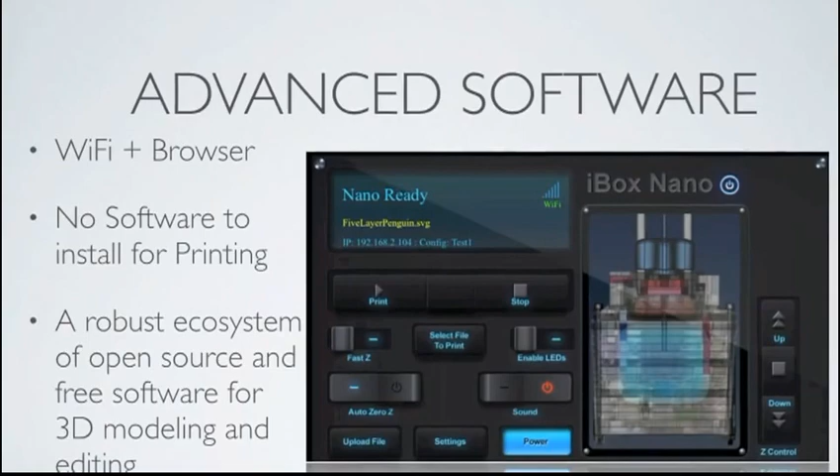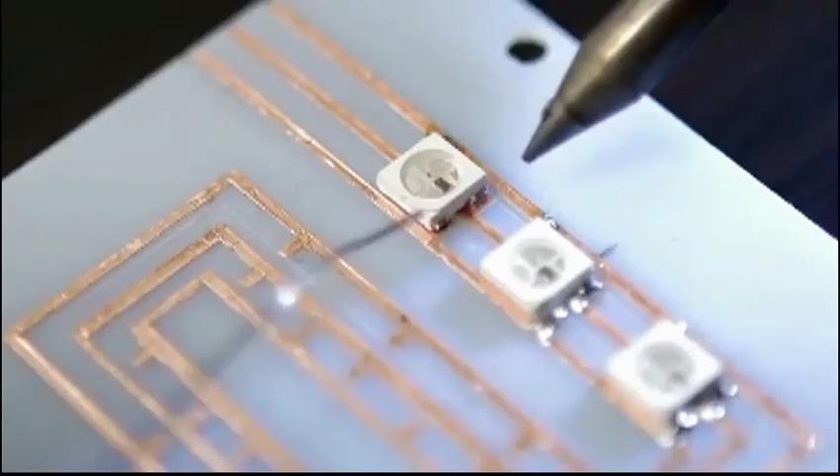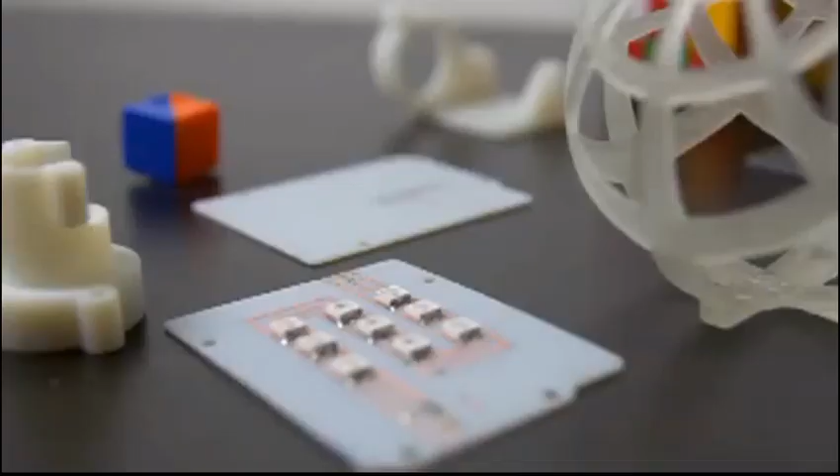Printers for the past 6 years, and these are really amazing tools for creating 3D objects right on your desk. But as an engineer, I really wanted to have those capabilities for electronics as well. We wanted to optimize rapid prototyping in a big way by making a stable and reliable machine that is future-proof.

The next one will change the landscape of 3D printing because it's the first electronics and multi-materials 3D printer that's affordable and fits on every desktop.

The next one is the first of its kind, being able to print integrated circuitry, multi-material and multicolor, all in one beautiful and simple design.

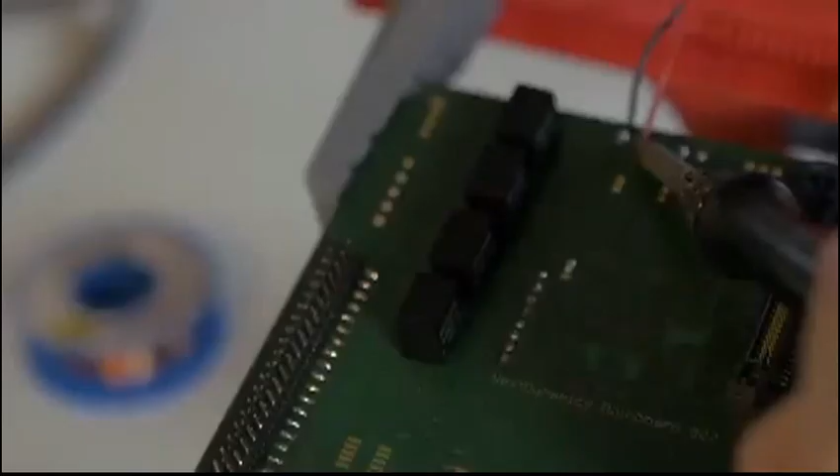We have designed the next one from the ground up and created a totally new type of printhead that can be precisely calibrated to print materials of many different characteristics.

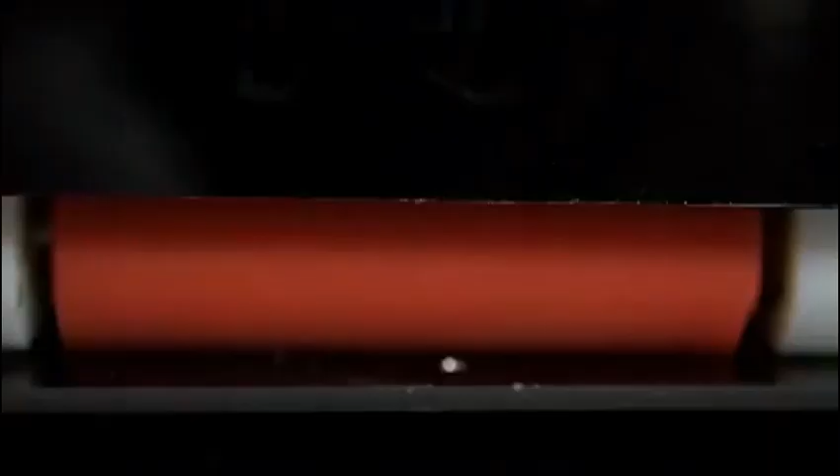We can already print conductive materials with super low resistance and combine them with many different ones that can be flexible, rigid, transparent and much more.

We also allow for the use of support material that can be rinsed off easily with regular water, which will make printing much more economical.

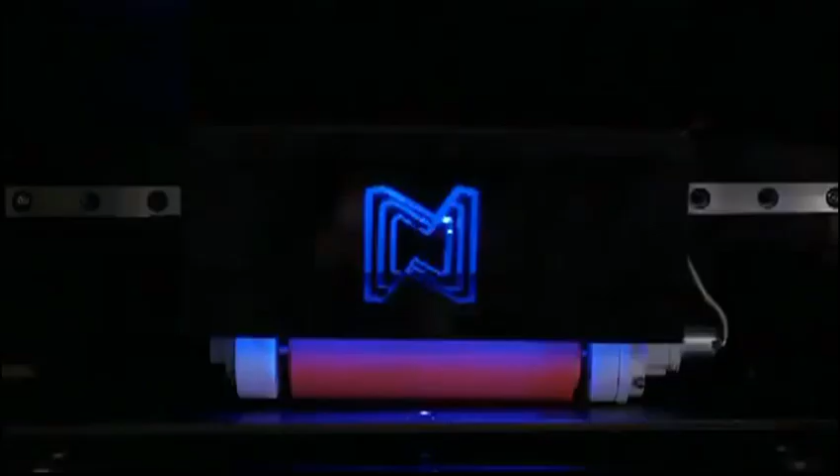We achieved this by using high precision nozzles that form tiny droplets of material. These droplets are deposited on the printing bed and then cured by a UV light.

In the design phase, we envisioned a printer that will take off the workload from the user and make for an easier and more fluid experience.

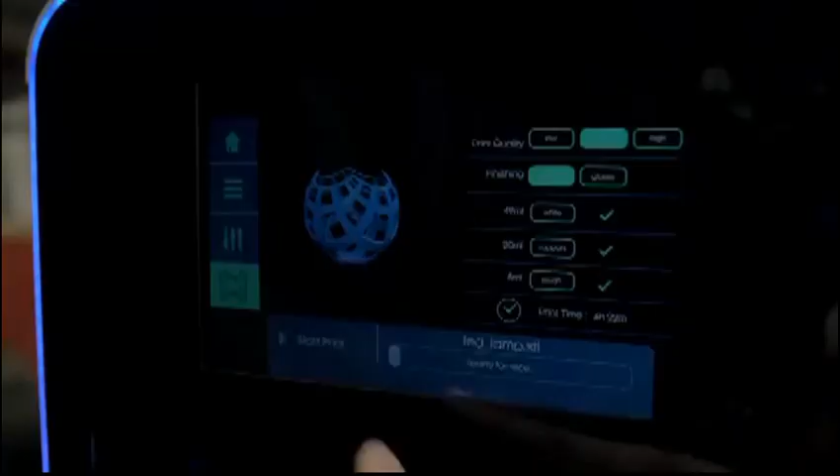We had a printer in mind that will take any 3D model and slice it onboard, so it will be printable in an instant. We are a German company, closely working with people at the Fab Lab in Berlin.

We streamlined our development by listening to consumer feedback and improving the printer with each generation, and we hope to bring this amazing technology to even more people than any other printer before.

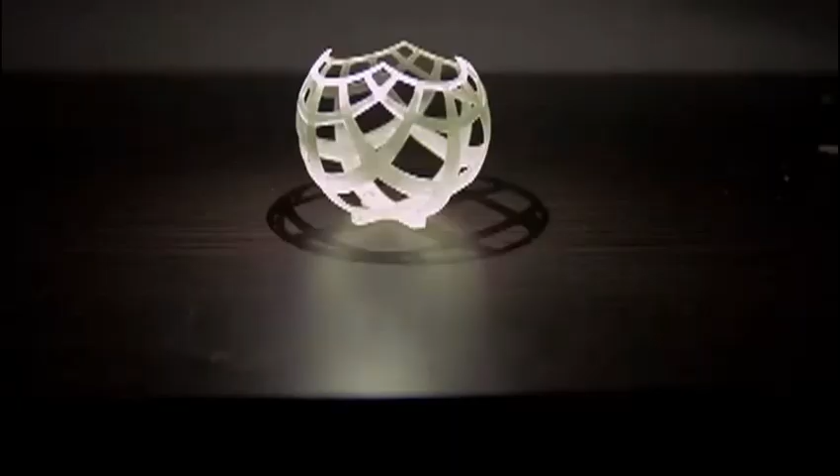As the combination of many functional materials, extreme precision and the printing of integrated electronics is now finally possible.

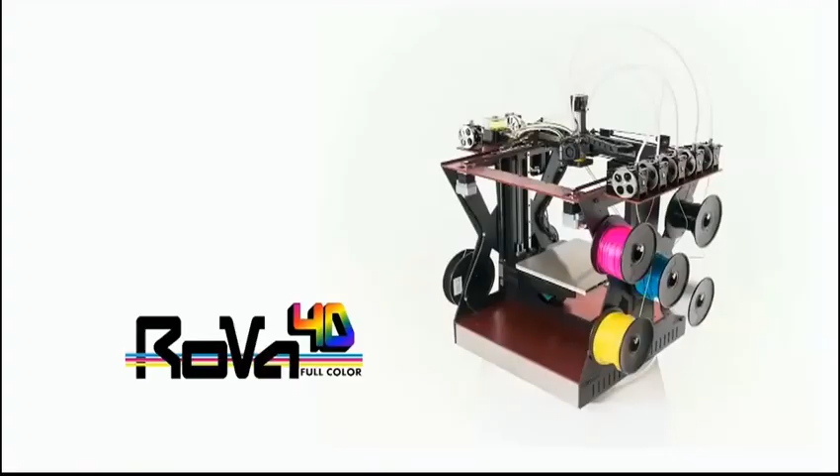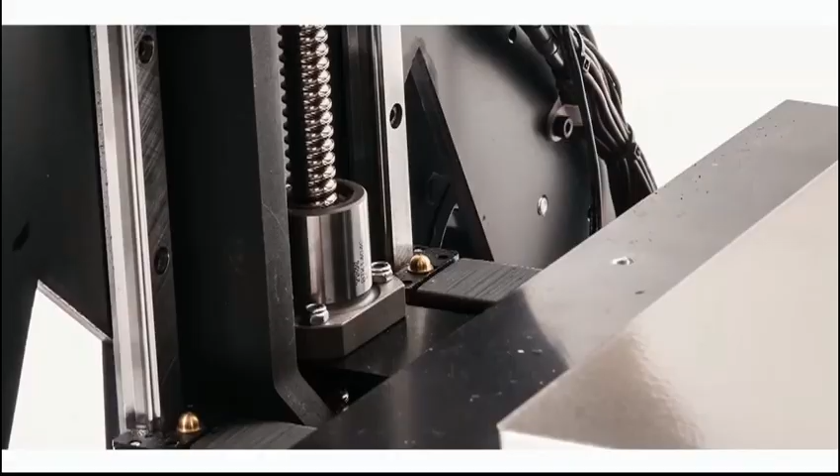The ROVA 4D is an improvement in every way. It has a 12 by 12 by 12 inch build volume, aerospace grade aluminum frame, THK profiled bearings, Z ball screw, dedicated dissolvable support and flexible filament extruders, automatic bed leveling, a print layer cooling fan, liquid-cooled hot ends, and a wireless interface.

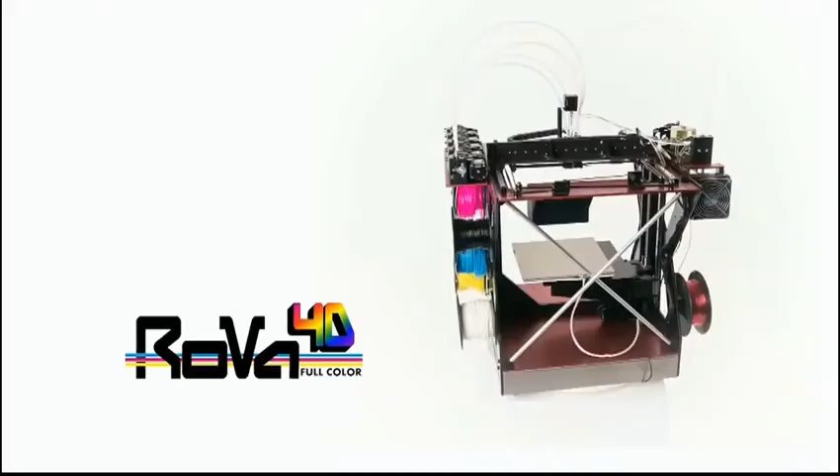As a 3D printer, it is the best value in the industry. But it's more than that. It's a full-color 3D printer.

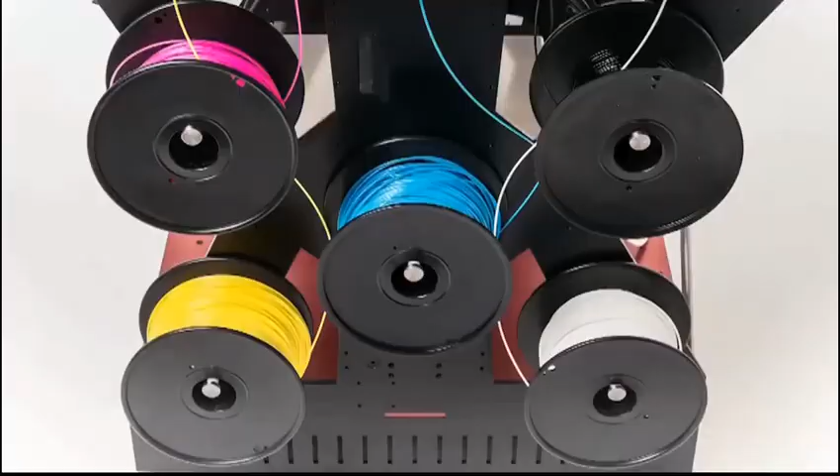It works by using cyan, magenta, yellow, black, and white filaments and feeding them into one hot end where they are blended or mixed together at various ratios to get unique new colors, CMYK, like your office inkjet printer.

You wouldn't think about going back to black and white TV. Full-color 3D printing is a better experience.

Instead of buying filament in a specific color and then loading it into the printer, you simply select the colors you want visually from an infinite palette, and the printer automatically adjusts the color.

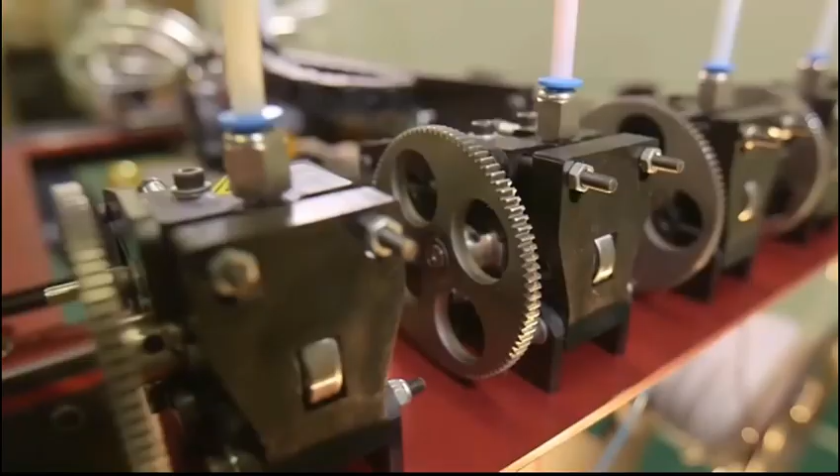Even though our professional-grade printers will please even the most critical engineer, we've made it so easy to print in full color that even a child can do it.

It's as easy as pick, paint, print. First, pick your model from the millions of free models that are already available online. Then paint the model—I'm going to paint a gecko. Then print the model.

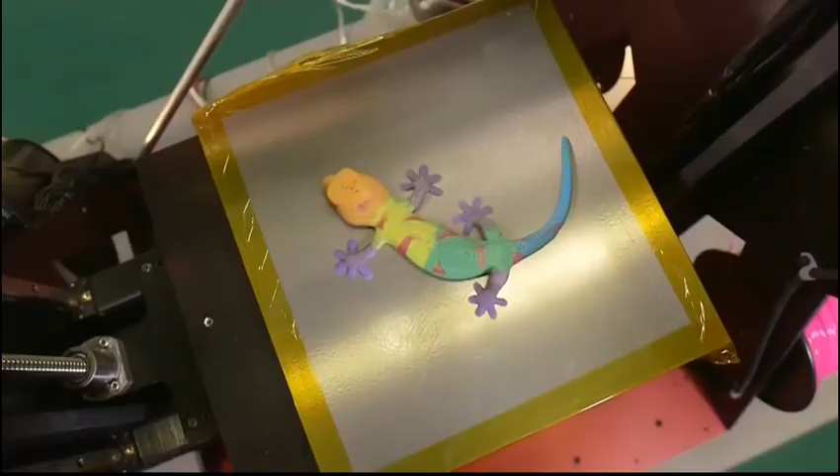We're still prototyping the Rova 4D and making leaps and bounds every day.

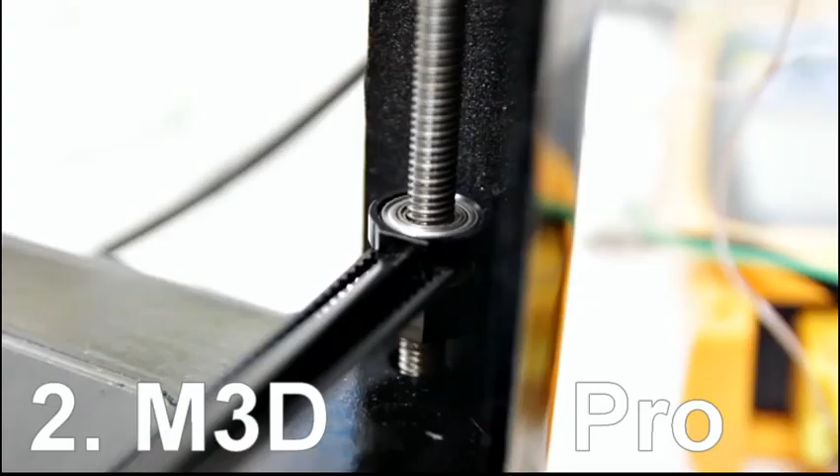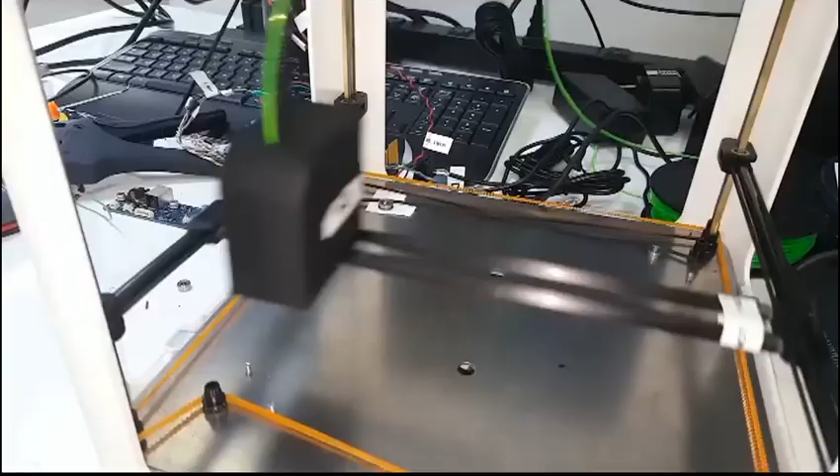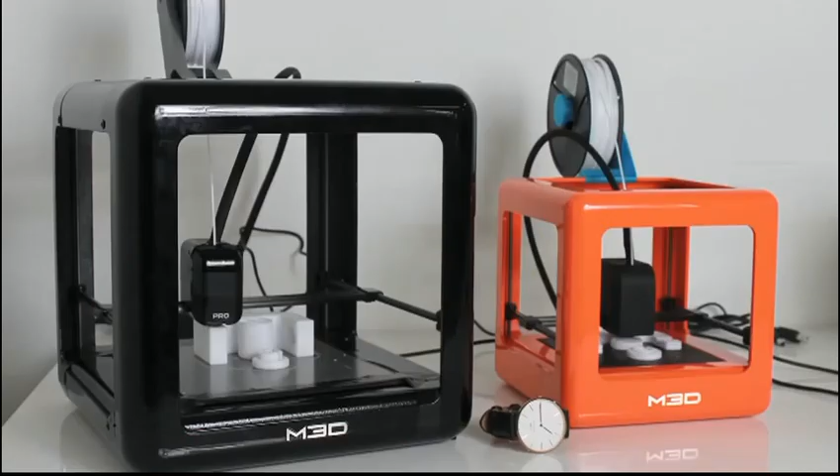About 6 months ago, we decided to make the M3D Pro based on feedback from our existing users. We've already gone through 3 iterations of design prototypes and are almost completely done with the engineering. 3 months ago, we proved a lot of the important concepts like making a heated bed that uses less power, proving it can move faster, and proving the benefits of higher quality, higher precision metal parts. Right now we're going through the final phases of proving the feedback system and finishing the next steps in programming.

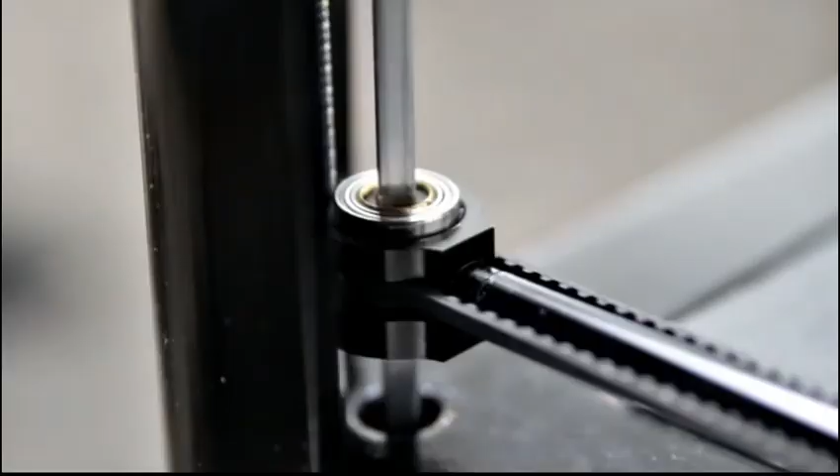Our goal with the M3D Pro is to make the most reliable 3D printer in history, and the way we're going to do it is by combining a full suite of sensors, what we call a sensor network, with precision metal parts. The combination allows the printer to become more self-aware, and it can correct for errors common in all 3D printers, cheap ones and expensive ones, things such as filament snags, print head crashes, even power outages.

The first time I ever heard about 3D printing was when one of my friends printed a Ninja Warrior training hold, and I thought it was really cool.

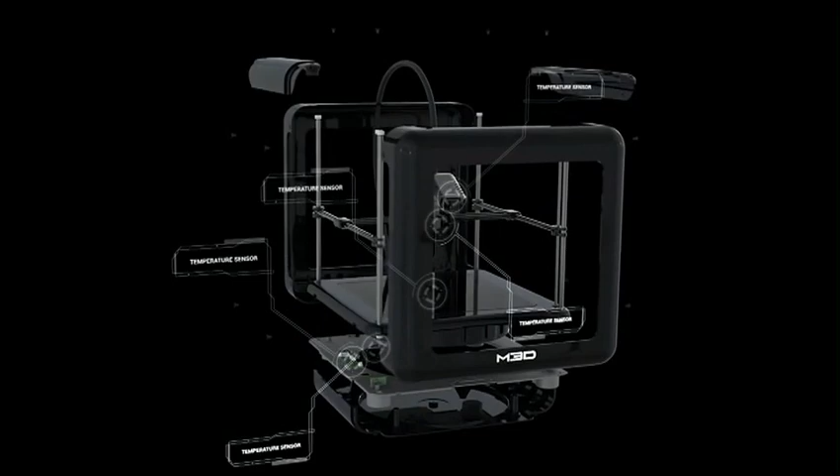The unique thing you're getting with M3D Pro that we haven't yet seen in this industry is the ability for the printer to sense many different things within itself. It can sense position, speed, and temperature in 5 different places, and if there's a problem, it can be self-diagnosed and in almost all cases self-corrected. Ultimately, that gives you more time in the creative process.

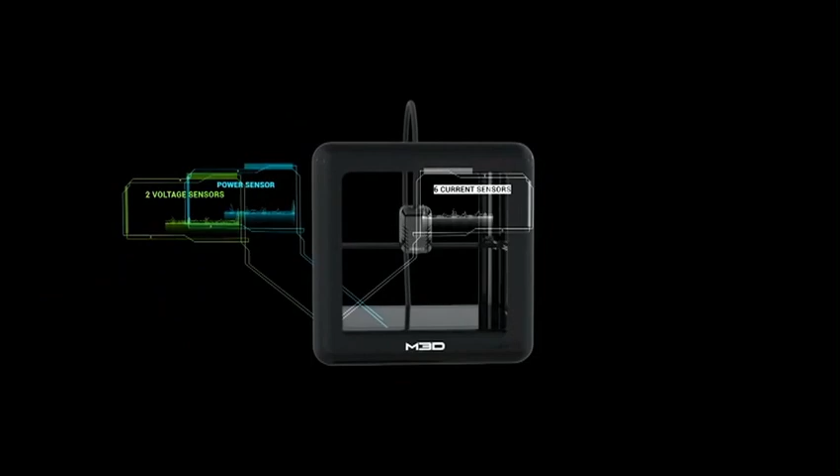With 3D printing, I have one right on my desk, or my granddaughters have one on their desk. If they get an idea, they can try to make that idea on a 3D printer right there. They can turn their ideas into reality. This I didn't have when I was a kid.

Really, the greatest advancement that 3D printing could accomplish at any point in the future is ease of use, making it so that anybody can just go from an idea to creating that idea within an afternoon.

We've introduced this new thing that we call tutorial mode. What we got from feedback from our original backers was that they wanted more detailed guides so they can grow into becoming an expert user rather than having to start as one.

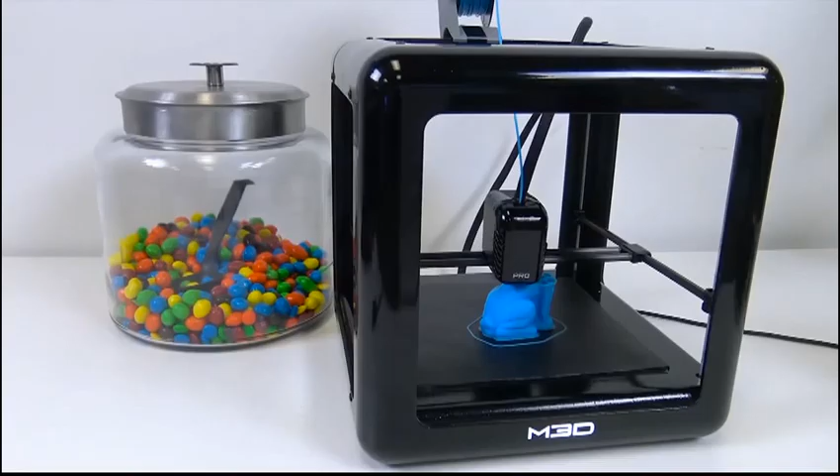The thing I think needs to happen for educators is speed - how fast we can turn around. With M3D Pro, you have the ability to print a single prototype with extreme accuracy and high quality, but you also have the ability to take that prototype and print it in quantity, covering the entire print bed with multiples of your model and producing it at volume.

I am so excited for the future, not only for me, but for my daughter, to grow up being able to use her mind to create anything she wants to, thanks to a 3D printer.

I've been fascinated with the whole idea of 3D printing for quite a while now, focusing on simple things I could print for around the house or toys to play with my kids. Really just the idea that I could create something myself.

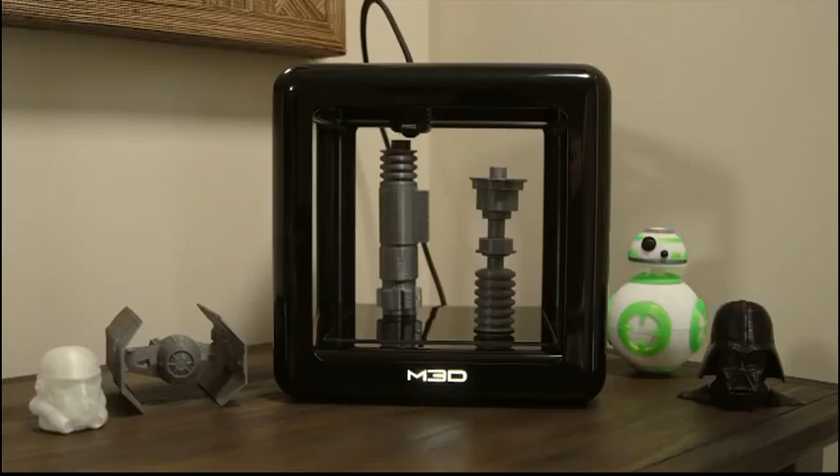So the M3D Pro is already successfully funded and is the largest crowdfunded 3D printer this year.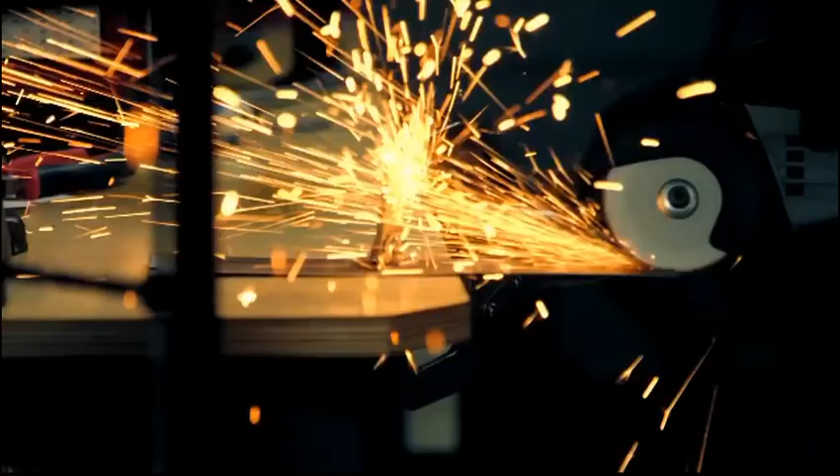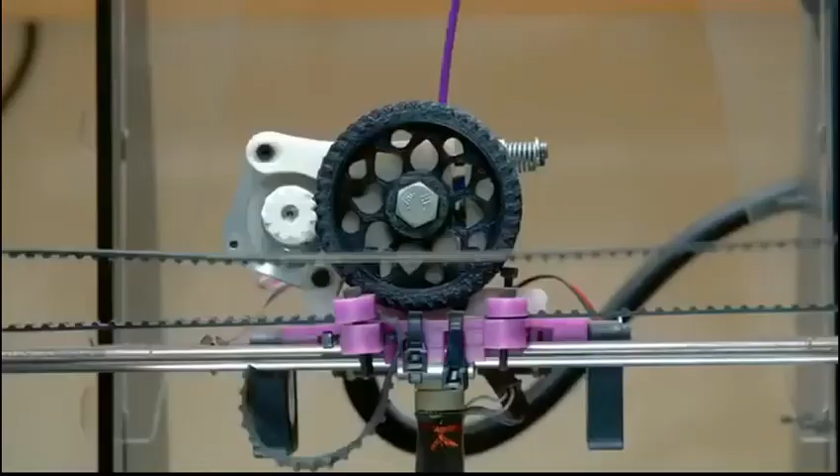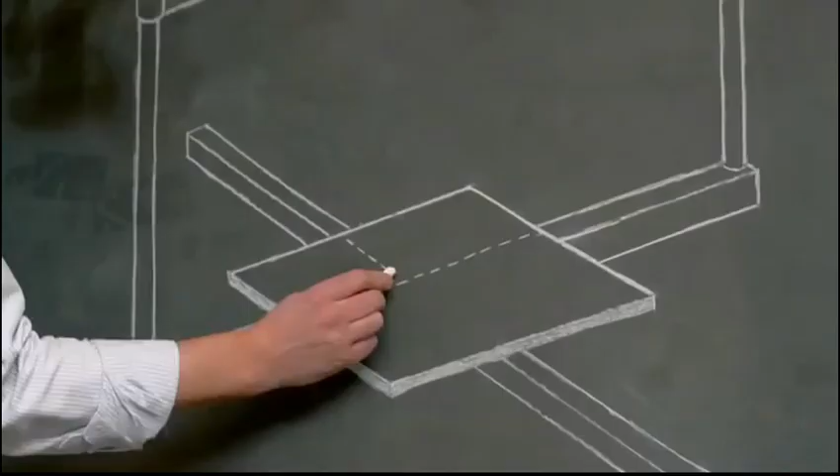Hi, we're the team behind Tiko. As inventors, we constantly use 3D printers to create and test our ideas. But every 3D printer we used fell short of our expectations. They were heavy, overcomplicated, and unreliable. We often spent more time calibrating our printers than printing our inventions. So we came up with a simple solution: Unibody. This is Tiko, the Unibody 3D printer.

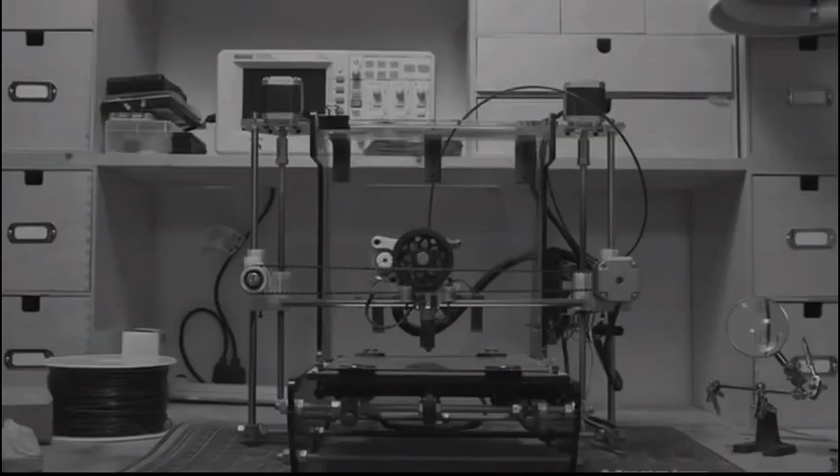Most 3D printer frames are built using separate rails. Unibody means the rails are built into the chassis, creating one solid piece. One solid piece, Unibody. And with this simple shift in design, all the problems that came from separate rail systems disappeared. More reliable and accurate, Tiko sets a new standard for 3D printers.

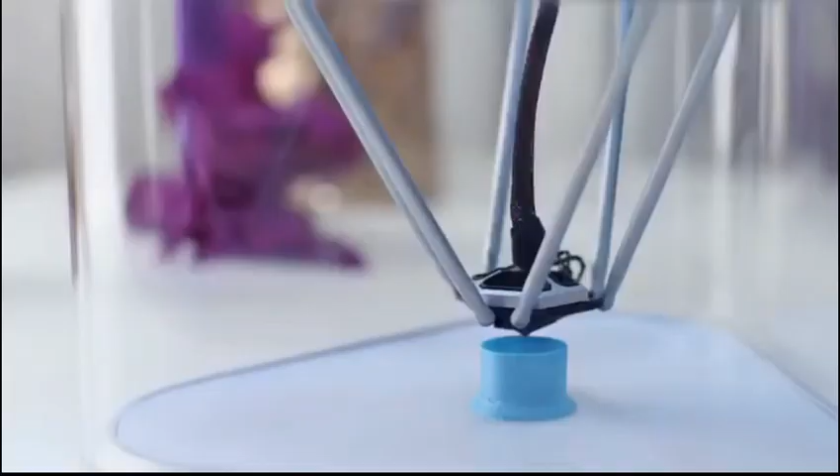And it doesn't stop at Unibody. Tiko has an internal filament tray, enclosed build chamber, auto safety shutoff, a large print volume, a flexible base, wireless connectivity, and cloud-based software so you can print from almost anywhere on any internet-friendly device.

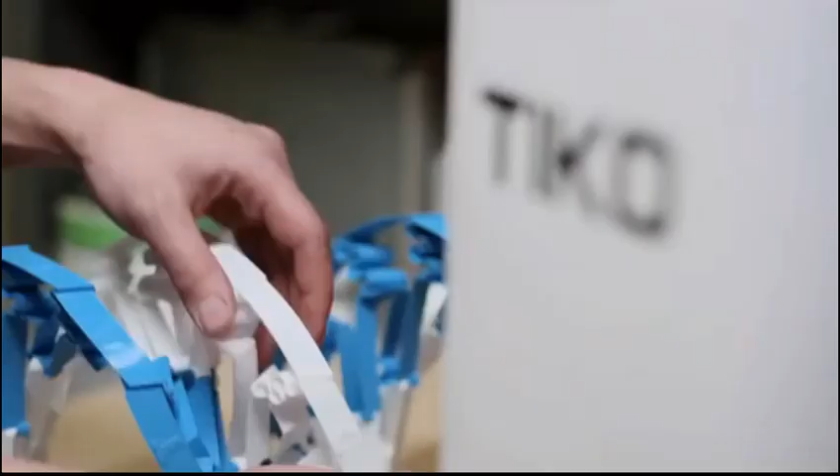With Tiko, we've not only set a new standard for design, but for price too. Tiko is only $179. Yup, $179. That's the beauty of unibody design. It's better and it costs less to manufacture. We could set the price higher, but we want everyone to have a Tiko.